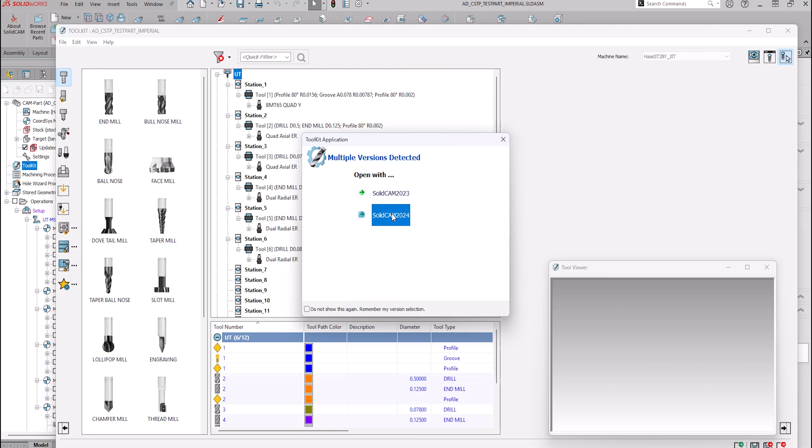And it's asking what format do I want those in, and I'm going to say 2024 because that's the version I'm using. So it's exported the tools. So now you close and save twice. Now we're good to go. We can now get our new part, bring it into SolidWorks, and we'll bring in the tools, and I'll show you how we do that.

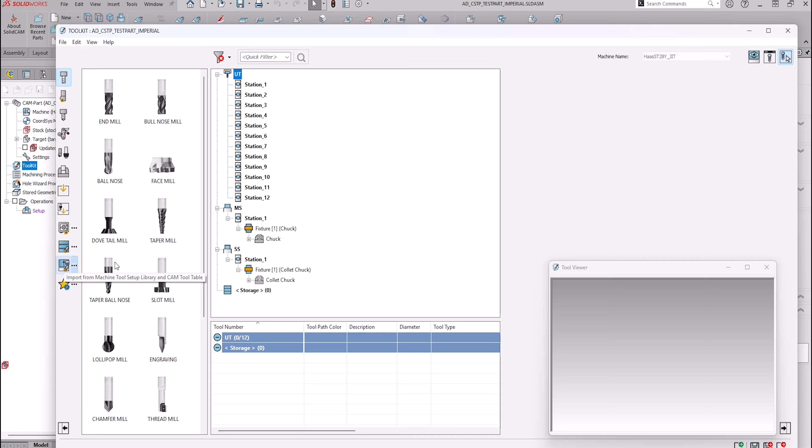So now I have a very similar part, and I want to bring all those tools with the mounting positions into this part file. Now I have already set up the coordinate system, the stock, and the target. So now all I have to do is go into the toolkit. And on the left-hand side, we're going to want to go to this button here. It says Import from Machine Tool Setup Library. I'm going to click the three dots. It allows me to browse out to a folder location. I'm going to select the file I just exported.

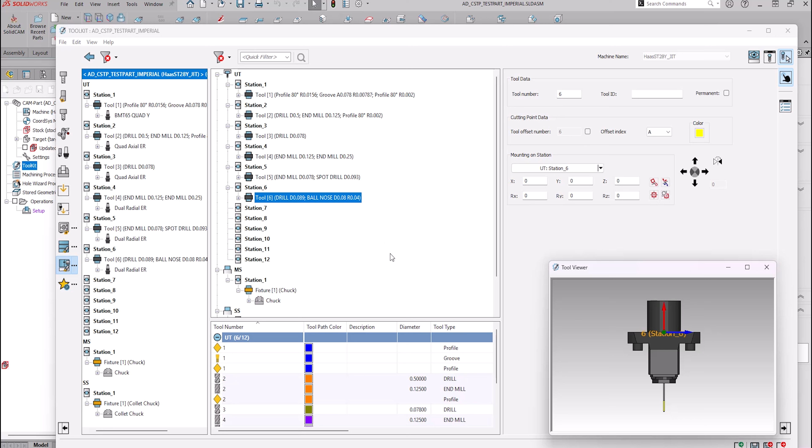Now I'm going to select the tools I want. I'm going to select all. You can either Control A or Select All, and then hit at the bottom right the blue checkbox. And now all of our tools are in and in the correct position. So you can save and close, and you're ready to start programming the next part. Next, I'll show you the .tls method.

So now we have a mill part, and we're going to use the .tls method, which will create a .tls file, and that will save out your cutting tool and your holder only. So it's good for mills, any milling machine, because the tool really has one mounting location, so it doesn't save the mounting location. So this is the proper one for mill. In this case, we're going to start pretty much the same workflow with just a slight difference.

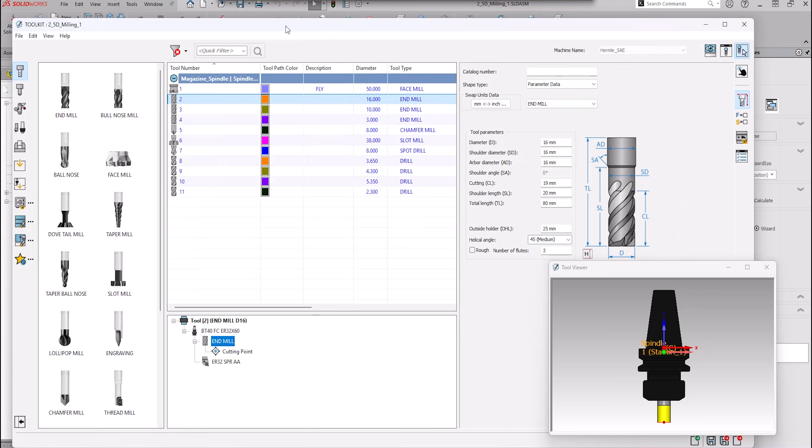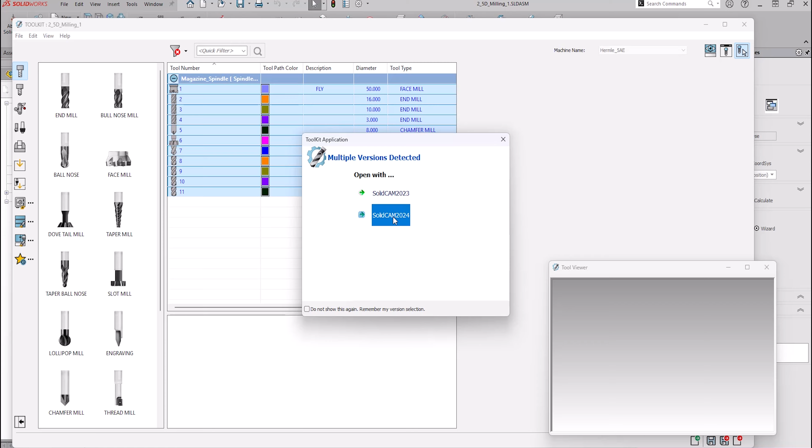I'm going to double click on the toolkit. This time we do have to select the tools we want to export. In this case, I'm going to do a select all. And then we're going to go to File, Export to File, change it to .tls. I'll call it this. And we're going to do 2024. And there we go. We have all our tools. We're going to save and exit twice.

So now we're going to go to our other file. Now we have a part that's very similar, and I want to use the tooling from the other job. So I have already set up the coordinate system, stock, and target. So I'm going to double click on Toolkit. And then I'm going to go to a different button. We're going to go into this button where it says Import from Tool Assembly Library. So I'm going to click on the three dots, and I'm going to grab the file I just exported.

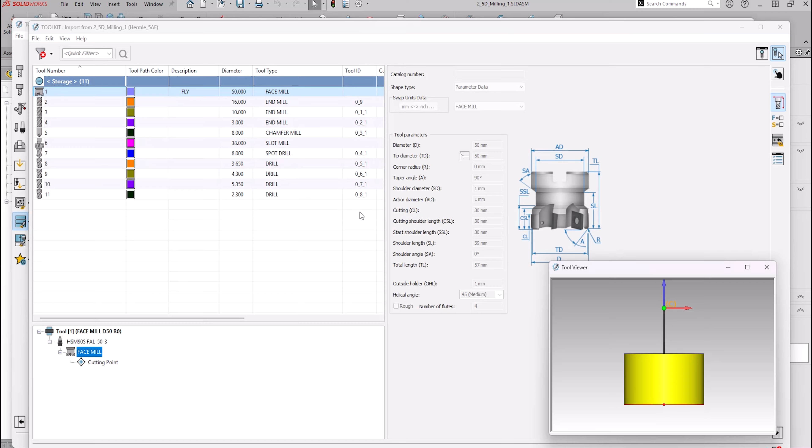I'm going to select all because I do want all the tools, and then hit the blue check at the bottom right, and then you're going to hit Save and Exit. All of your tools are in this part file and ready to go.